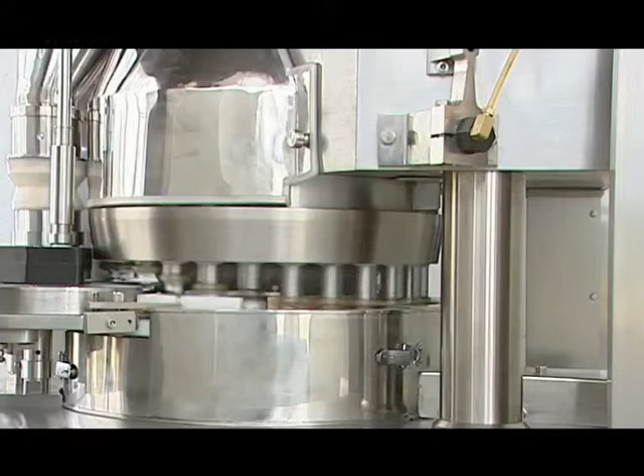GZPT series of high-speed rotary tablet press machine produced by Liaoning Tianyi Machinery Company Limited, applied in pharmaceutical, chemical, food, electronic, etc. industry. This machine can press granular material into tablet and applied for the production of round and abnormal medicine tablet, sugar tablet, calcium tablet, etc. in great quantity.

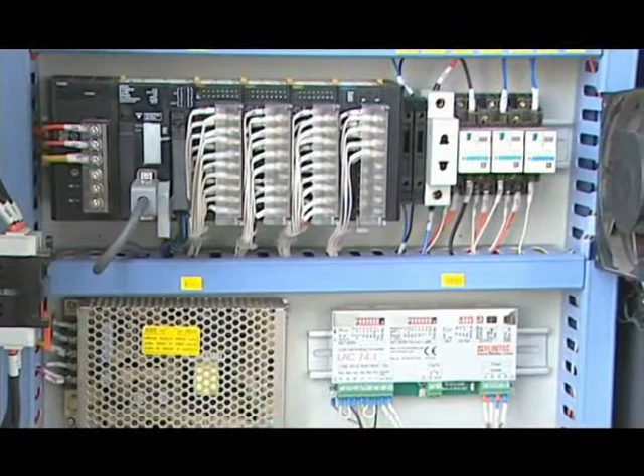Installment and connection. The tablet press machine must be installed on four shock absorption bases, cannot be fixed on ground after installing and locating the machine. Use level indicator to calibrate and level the machine. The electric power must be connected to pad board L1, L2, L3, and PE. In distribution box, ground wire needs to be connected to ground PE according to the rule of this machine.

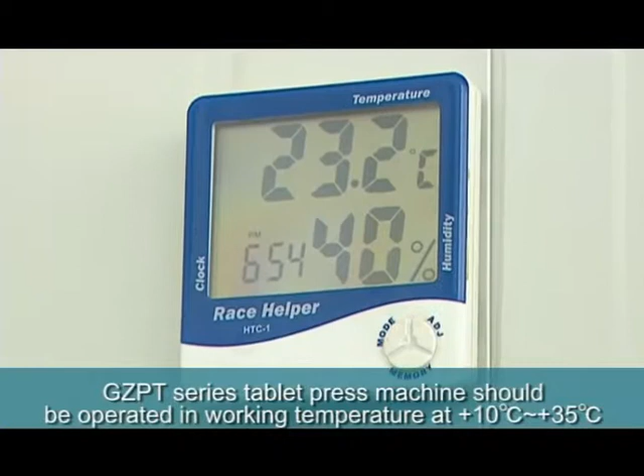Before starting the machine, check working voltage of electric power to see if the voltage is in accordance with the given number. The right rotating orientation of the module plate is from left to right, anti-clockwise. GZPT series tablet press machine should be operated in working temperature at 10 to 35 degrees centigrade. Relative humidity less than 85%.

Structure and working principle of tablet press machine. The tablet press machine can be divided into two parts, upper part and the lower part of a terrace. The upside of tablet press machine is the totally sealed tableting room. This is the part to complete the whole working procedure. Include the force feeding system, punch press system, tablet output equipment, dust collector system.

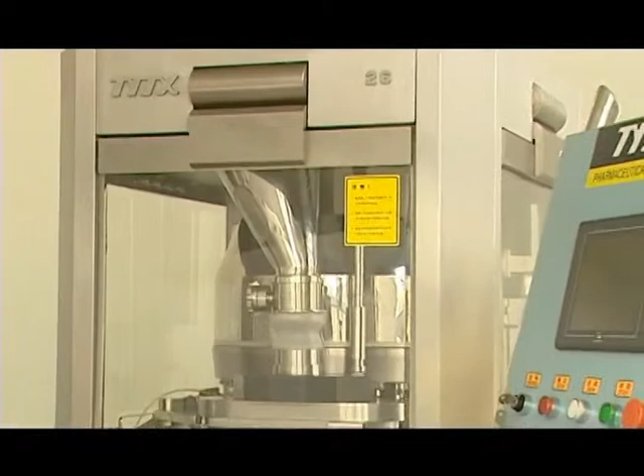The components of tablet press room include top plate, cover board, and a glass door. Through gland strip, the glass door can seal the tablet press room totally to prevent the pollution from outside. The units of the lower part of tablet press machine include the main drive system, lubrication system, etc. Through gland strip, the front and the back door, left and right door can seal the lower part totally to prevent the pollution from powder.

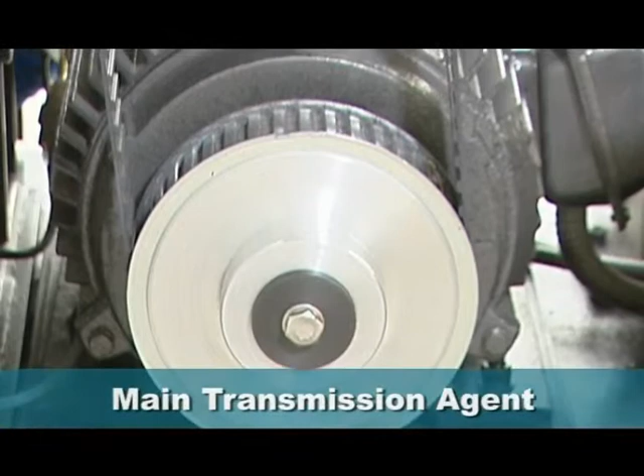Working process of tablet press machine. Filling, pre-pressure, main pressure molding, tablet output. Main transmission agent. Main transmission agent includes AC motor, big belt pulley, synchronous cog belt, little belt pulley, hand wheel, worm wheel reduction gearbox, main axis, transducer, etc.

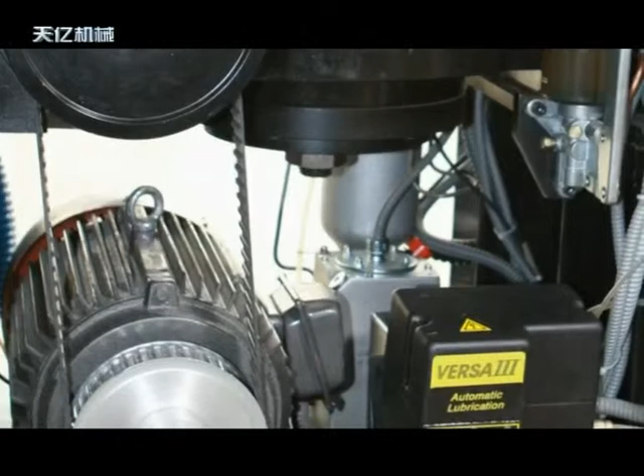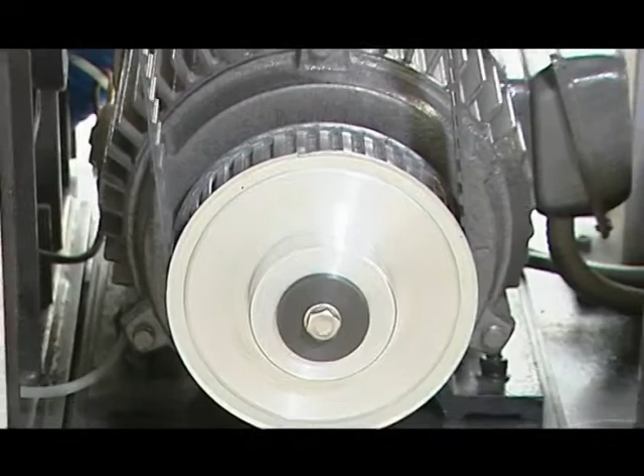Outputting axis from main motor connected with the little belt pulley through straight key. Little belt pulley transmits the power to big belt pulley through a cog belt. Big belt pulley connected with a worm rod of the speed gearbox. Worm wheel installed on the main axis directly. Main axis connected with the module plate through caulking rim to drive the module plate.

The machine allocates a set of independent hydraulic system, a set of electric thin oil, and a manual grease lubrication system to provide lubrication for every part of the machine.

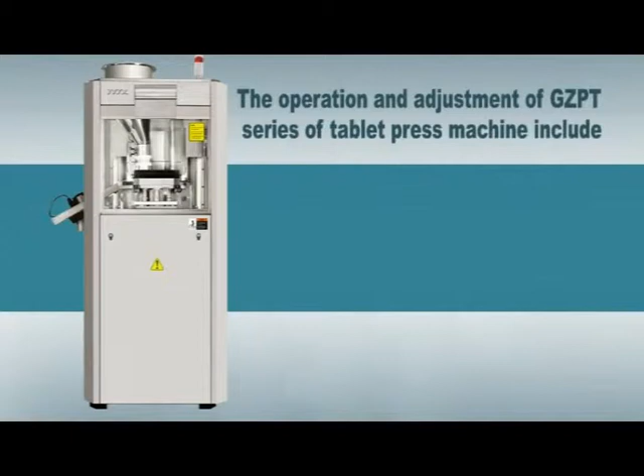Machine operation and changement of a module. Now we take GZPT-26 as example to introduce the machine. The operation and adjustment of a GZPT series of high-speed tablet press machine include installment, checking, running, and main parts demarcating.

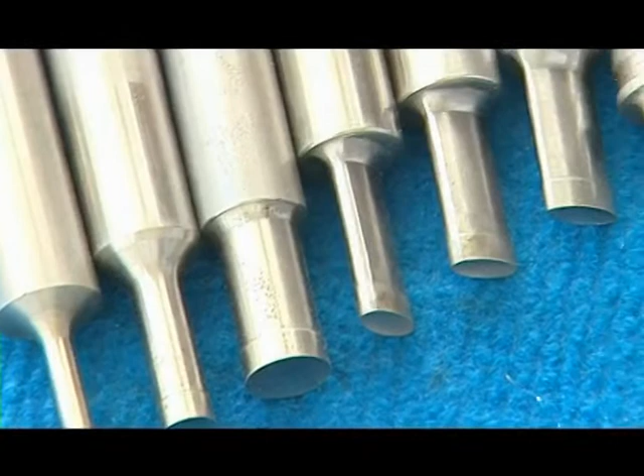Installment of the machine includes installment of a module, changement of the cam of a lower guide rail, installment of a powder scraping plate, installment of the parts of a powder blocking rod, installment of a feeder. According to the different module installed, the tablet press machine can press the tablet in different shape, such as round, abnormal, or cartoon tablets. Here, we merely introduce the installment of round and abnormal module.

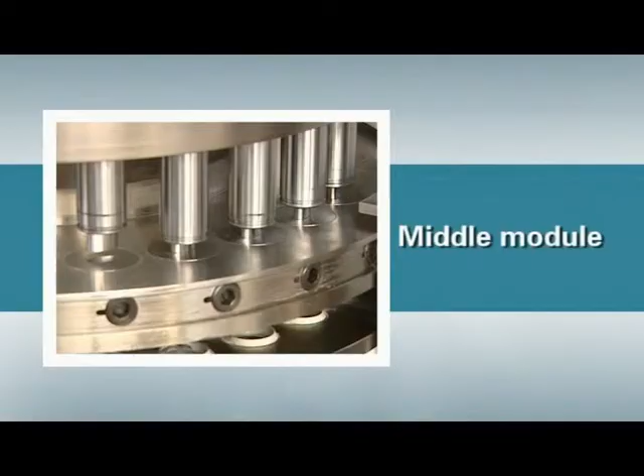Installment of round module. Installment of round module includes the installment of a middle, upper and lower module. 1. The installment of a middle module. Open the front glass door. Take away the force feeder and the little guide rail in front of the upper guide rail. Unscrew the module fasten structure. Note, the head of a middle module fasten structure cannot come out to the outer margin surface of the middle module plate. Clean up the middle module hole with module base cleaner.

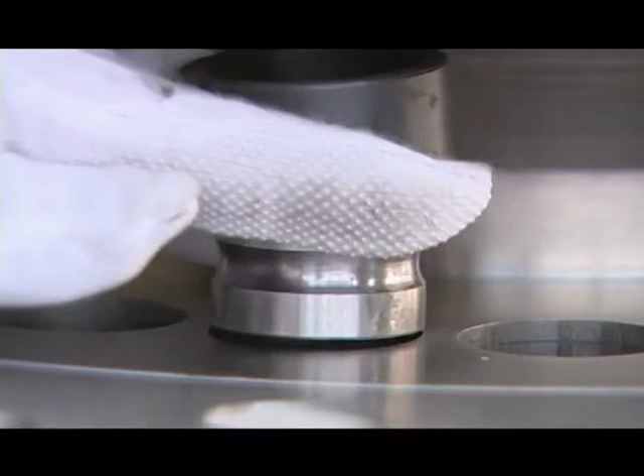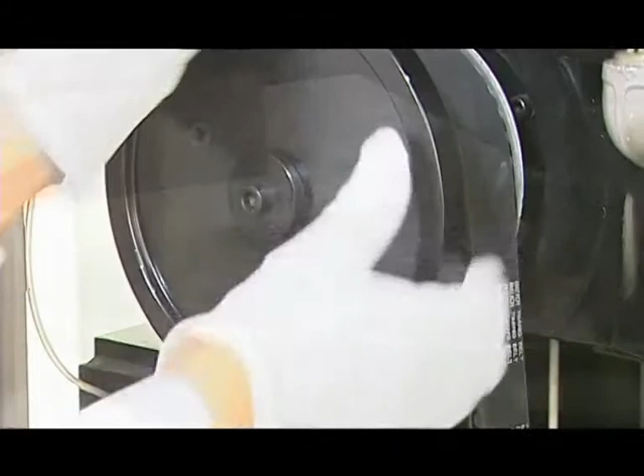Match the middle module in front of the middle module hole and place the middle module at the trough of the guide rail disc. In a middle module mounting pad, flip middle module with a handle spindle. When the middle module enters into the hole by 2/3, thumb it into the right place, then fasten the module fastening combination. Run the machine by hand. Install all the middle modules according to the above direction. Use the knife straight edge to make the gap between head face of a middle module and working table of a middle module plate at 0 to 0.03 millimeters.

The installment of upper module. Clean the upper module at the trough in front of the upper guide rail. Put the upper module into the hole. After all the upper modules are installed, install the upper module protecting plate. Note: be sure that the protecting button is pressed. Install the oil receiving ring.

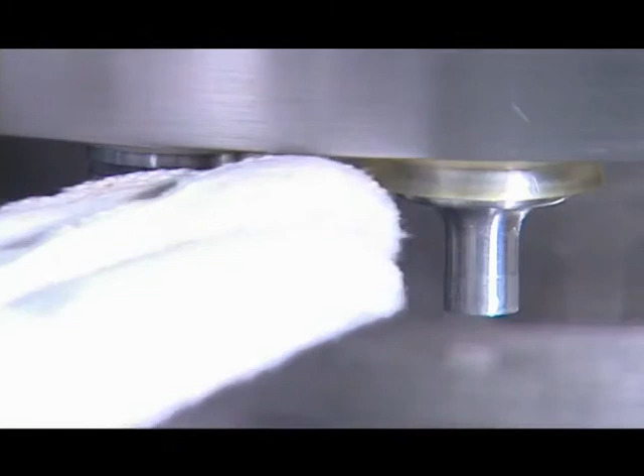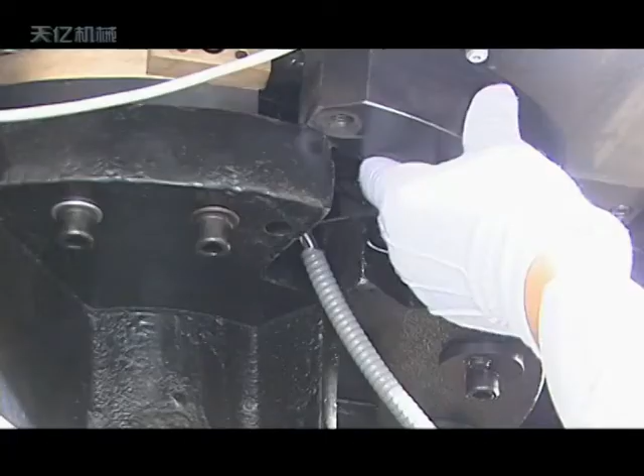The installment of the lower module. Take away the transmission block and clean up the lower module. Press on the pressing board. Install the lower module into the hole and push it upwards. After all the modules are installed, install the transmission block and fasten screws. Note: protecting button must be pressed by transmission block. 2. Installment of abnormal module.

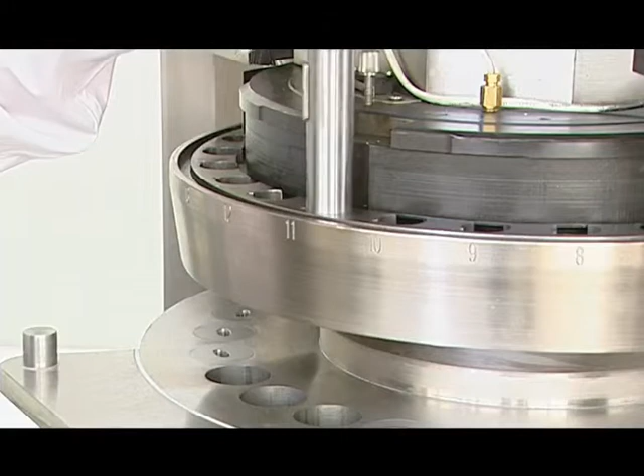The installment of the lower module of abnormal module is the same as the installment of round module, but a little different between the installment of a module and the upper module. Take away the little guide rail on the upper guide rail plate. Make the key of the upper module match the key slot of the upper module plate. Then insert the upper module and get the upper punch into the middle module.

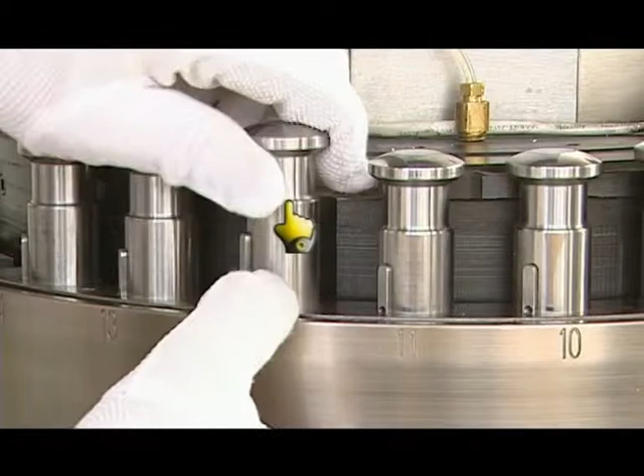Install the next group of upper and middle modules after that, dovetailing into each. After correctly installing the last middle module, put out the upper module, fix the little guide rail, fasten screws, then install the upper module.

3. Change of upper guide rail cam. The filling depth of the powder could be adjusted through the change of the upper guide rail cam. First, take away 7 to 9 pieces of upper punch and unscrew the screw under the upper guide rail cam. Take away the location pin component beside the screw.

Then move the outside base plate of the upper guide rail cam forward. Put out the upper guide rail cam clockwise. Move aside the base plate and take the upper guide rail cam off. The installing process is contrary to the dismantling process.

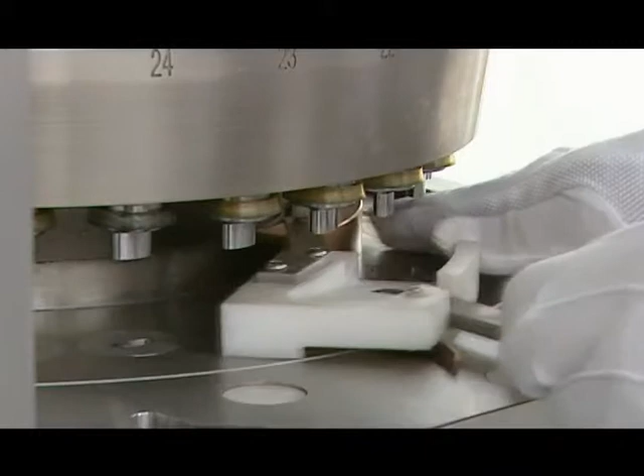4. Installment of the powder scraper. Connect the copper collar and the powder scraper with a pin and install them at the right of the module disc. Adjust the support plate to make the pressure board press on the module disc smoothly. Check the connecting status of the powder scraper on the middle module disc. No gap but have elasticity.

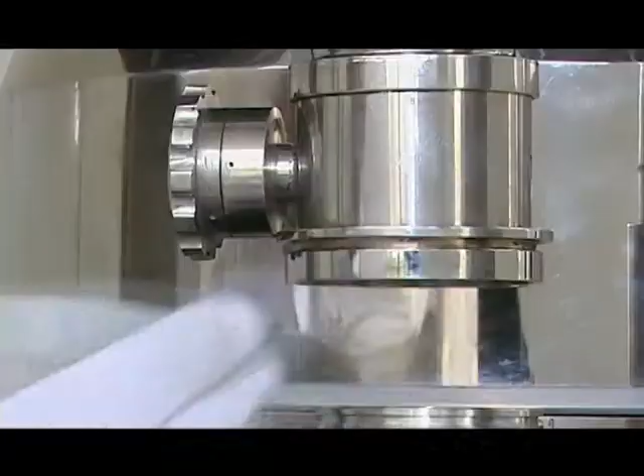5. Installment of feeder. Pull the cleaned feeder in along the upper surface of the plane stage. Lock the feeder with the pressing handle. Connect the chute outlet of the feeder outlet with the extension tube. Rotate the hollow shafting to connect the prolate axis and axis guide. Close the control valve. Now, the GZPT series high-speed rotary tablet press machine is almost installed.

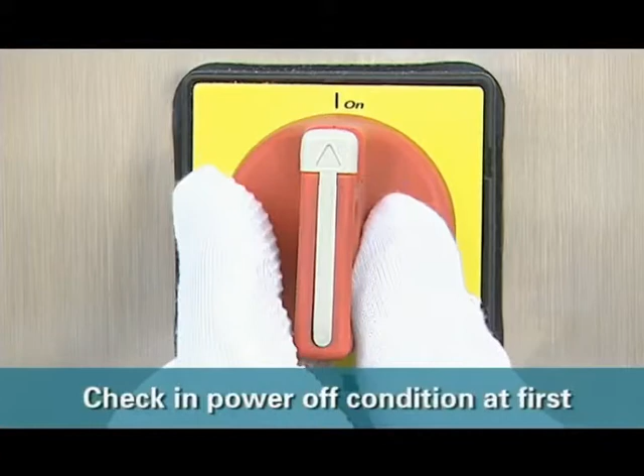Next, we will check the machine. Checking the machine is generally in two stations: loading check and unloading check. 1. Unloading check is the checking of the machine in the state of power off and power on after all the parts are installed. Check in power off condition at first.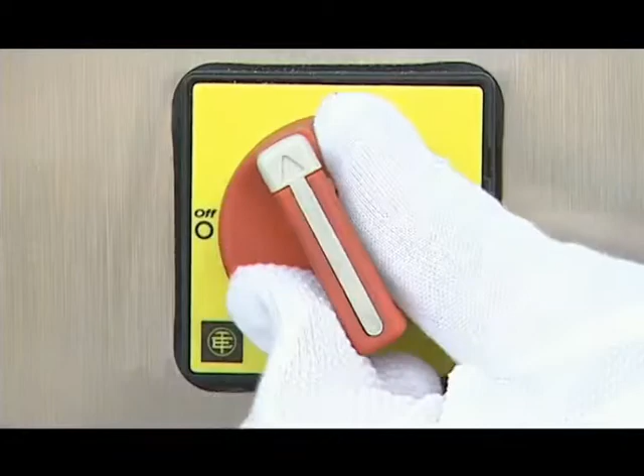After making sure that the machine is normal in the state of power off, checking in the state of power on can be carried out. Starting. Start the machine and enter into the starting interface. Check door and window protection. Enter into the device state interface. Enter into the door and window protecting interface. One can set the state at working or overhauling. When the machine is in the state of overhauling, the open door and window can be ignored.

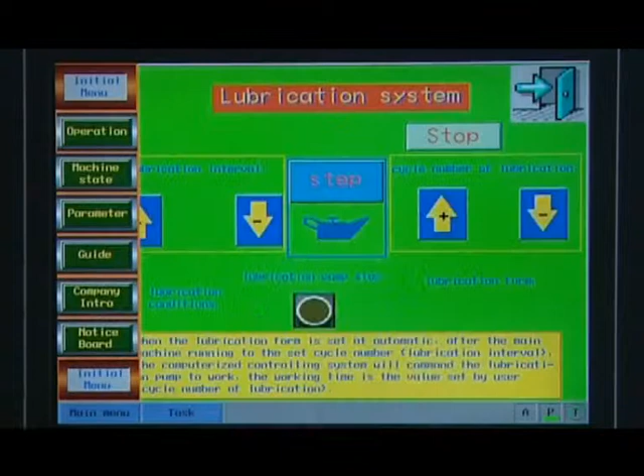Check the lubrication system. Enter into the lubrication system interface. Set the lubrication mode as manual. Press the manual lubrication button. Oil pump running and indicator light twinkling. Lubrication interval and the lubrication cycle can be set according to the practical situation. Back to device state interface.

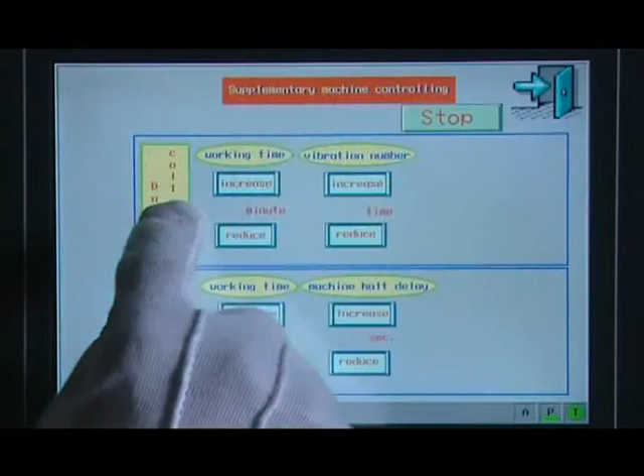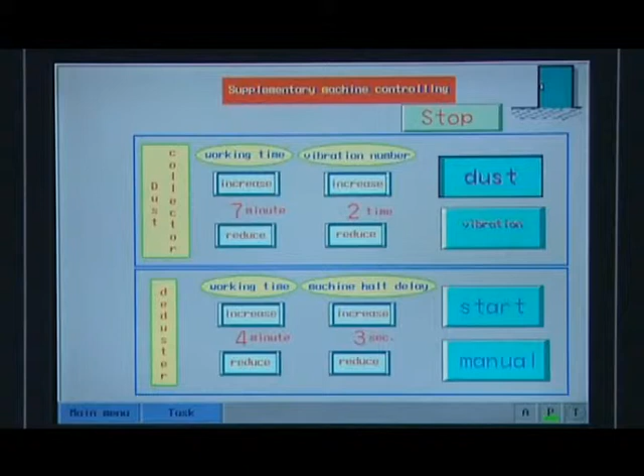Check if the dust collector is normal. Enter into the donkey engine controlling interface. Touch the dust collector key. The dust collector is running. Touch the shaking key. The shaking unit of the dust collector works. User can set the automatic working time and the number of times of dust collector shaking.

Check the deduster. Touch the starting key of the deduster, and the machine will start working. Touch this key again, and the machine will stop working. The automatic working time and the machine halt delay could be set according to different requirements. Back to device state interface.

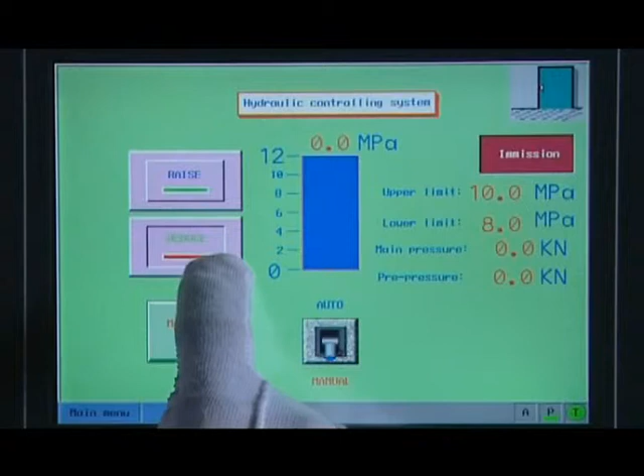Check the hydraulic system. Enter into the hydraulic controlling system interface. Pressing the lifting pressure and the releasing pressure keys separately can carry out the operation of hydraulic lifting and releasing pressure. Choose the input limits key for input permitting state to change the set values of hydraulic upper limit and lower limit. Cut manual state over to automatic state. The hydraulic value of the hydraulic pump can be controlled by computer. Back to device state interface.

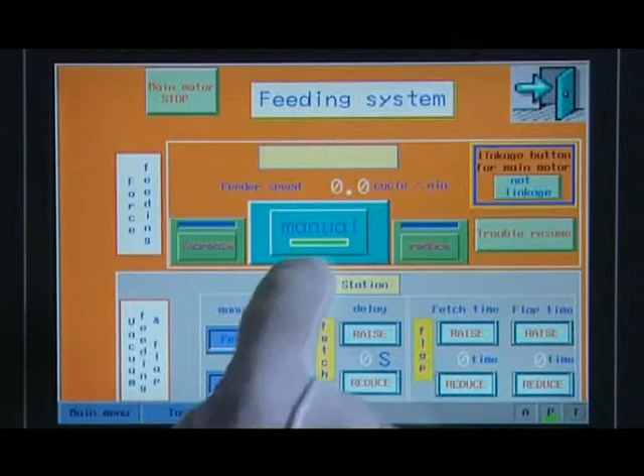Check the feeding system. Enter into the feeding system interface. Press the manual feeding button. The feeder is running. Touch the speed up key. The feeder speeds up. Touch the speed down key. The feeder speeds down. Press the feeding button again. Feeder stops running.

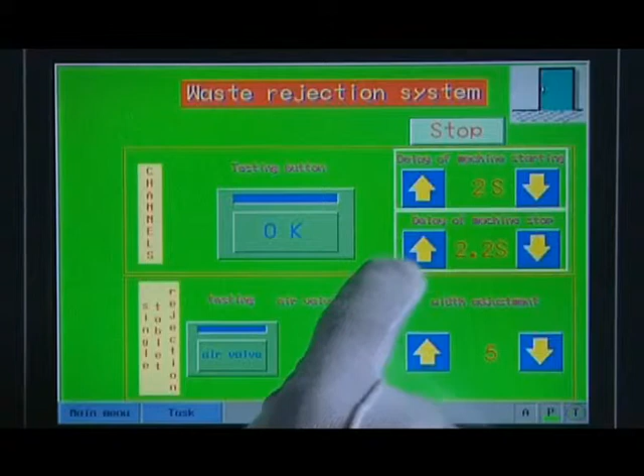Back to device state interface. Enter into rejecting system. Check the tablet output blocking board. Touch testing key. Tablet output blocking board. Open qualified tablet channel at right. Close unqualified tablet channel at left.

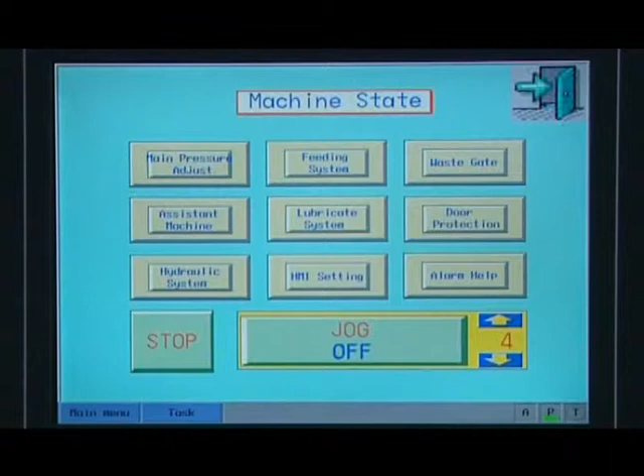The automatic delay time of the tablet output blocking board can be set when the main motor is running and stopping. Touch back key. Back to device state interface. Back to device state interface.

Enter into main pressure and fitting adjustment interface. Adjust the main pressure lifting and the main pressure reducing button. Observe the running parts of the main pinch roller. Make sure that the rotating action and orientation is right.

Adjust the tablet weight increasing and the tablet weight decreasing button. Observe the working part of the fitting adjustment and make sure that the rotating action and the orientation is right. Other checking: checking of a pressure value and a pressure amplifier.

Adjust pre-pressure. Through adjusting the pre-pressure hand wheel, run it manually, check. If the running is normal, press the running button to start the machine after everything is normal. Enter into single value monitoring page. The single value should be in 0.1 to 0.4 kN. It should be set to 0 if the number is not right.

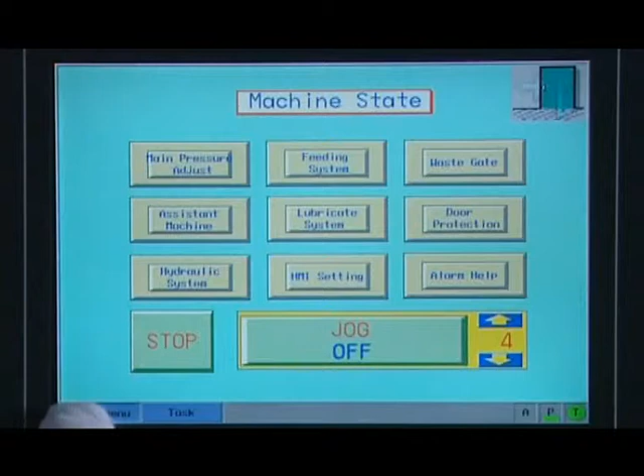After unloading, check in the state of loading. Spring check. Turn on the powder hopper switch. Enter into feeding system interface from the device state interface. Press menu fitting key. Make the feeder impeller rotate. Press speed up and speed down key to set the rotating speed after powder is filled up.

Touch manual fitting key. Set the fitting and go back to production running interface. Set the converting state of the rejecting channel as reject state, namely voice rejecting. Run the machine manually. Check if the machine runs and sounds normally. Production running will be carried out after everything is normal.

First, we need to set parameters for test running. Every parameter needs to be set for first production. Run it by hand and lift the pressure a little to shape the tablet. Note, the pressure should not be too heavy at this moment, just need to shape the tablet.

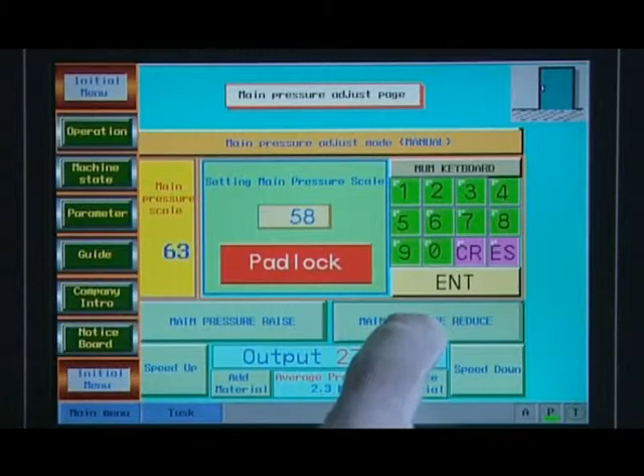Press running button, the machine runs. Through pressing powder increasing and powder decreasing button, adjust the weight of a tablet. Collect and weigh the tablets pressed at a stable average pressure value. After the weight of a tablet is qualified, press running, adjust the press lifting or press reducing button. Make the thickness and weight of the tablet reach the qualification.

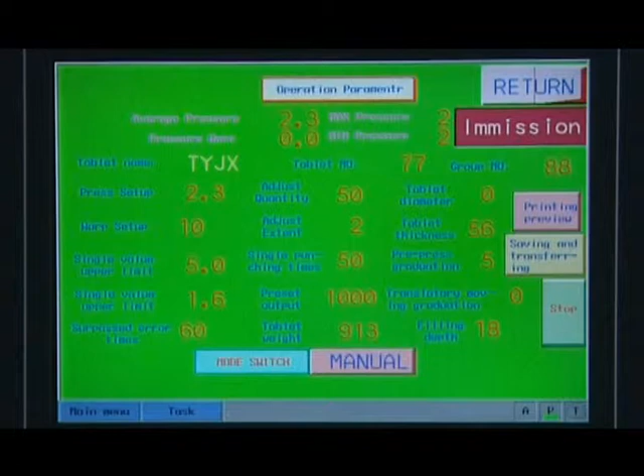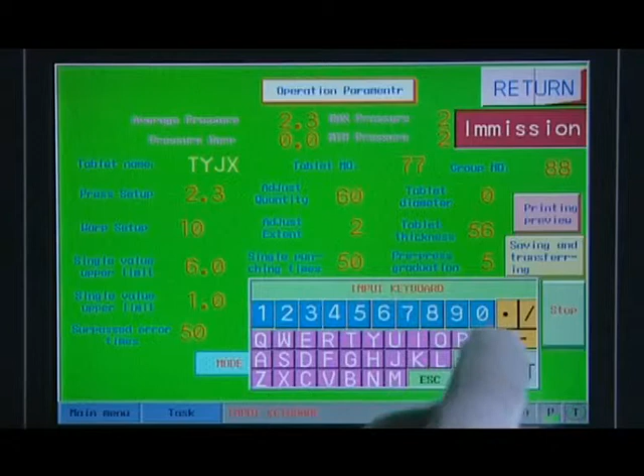Enter into parameter setting page, refer to the average press value, etc. Put the actual parameter value on the front of the page into the setting press parameter. Single value upper limit and single value lower limit are also set according to the actual value of max pressure and min pressure. But in principle, the value width is wider than the actual value of max and min pressure. Set standard deviation, running out times, adjusting width, single shot times, etc.

After setting parameters, cut over to automatic state. The machine will compare the set parameter to the actual average press value detected to adjust the tablet weight automatically.

How to invoke the saved parameter. After setting the parameter, touch the parameter saving invocation key. Enter into parameter saving invocation interface. At this moment, one needs to save the setting parameter. Touch the parameter number of the saving position. Press the saving key, and then the setting parameter is saved in the relative position.

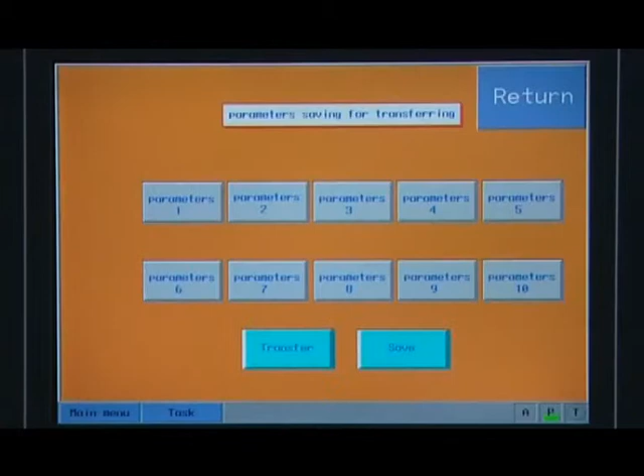When the saved parameter needs to be invoked, on the parameter saving invocation page, choose and press the number of the saved parameter. Press invocation button. The picture will invoke the parameter automatically. The code for the manufacturing parameter page and the related amendment could be carried out at this time.

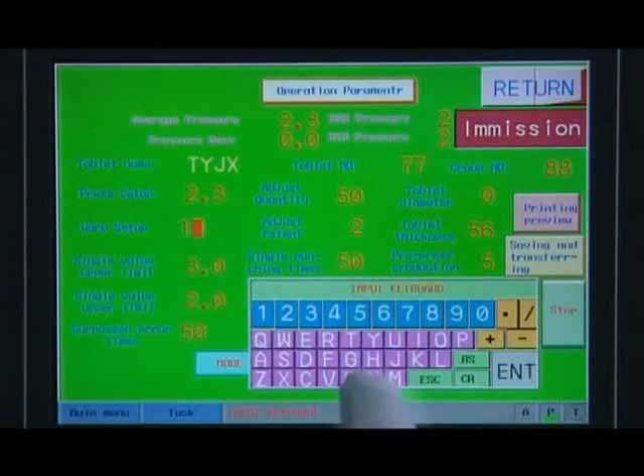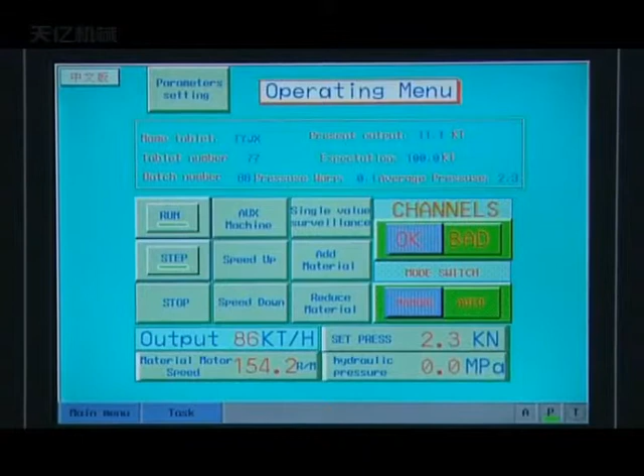Machine running. Press the main motor speed up button. Speed up the feeder rotating speed. Press feeding increase or feeding decrease. After detecting the tablet weight is qualified, make the average press value on production running page similar to the set press value. After the tablet weight is qualified, you can cut the mode over to automatic state. The parameter could be preserved after setting.

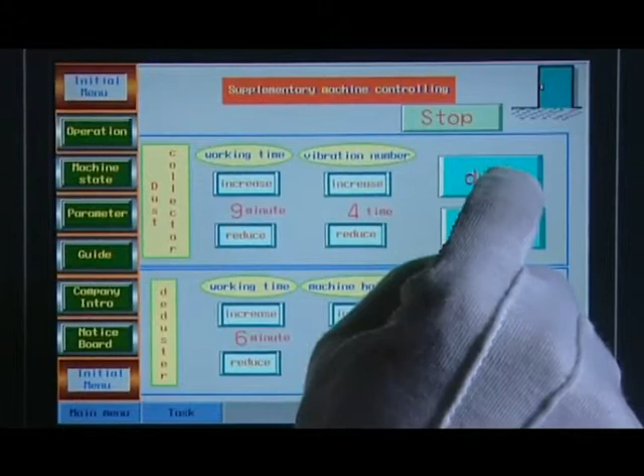Back to production running page and touch rejecting channel transfer key. Relieve force rejecting. Enter into donkey engine controlling page. In device state, start deduster, dust collector. The production will not need to be changed after settlement.

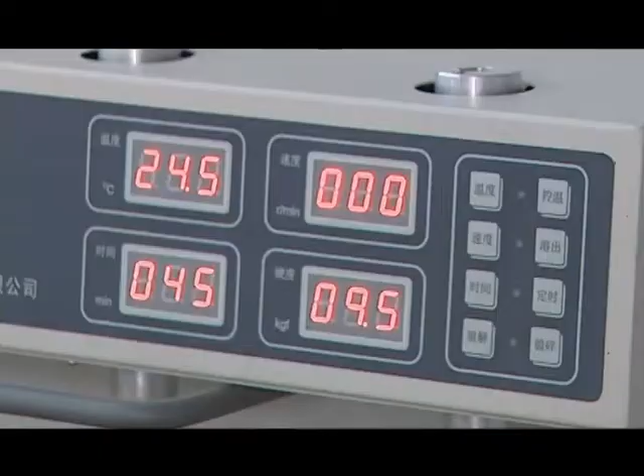If you want to change the speed, touch and click the speed up or speed down key time by time. Make the speed change slowly. The effect of automatic tablet weight adjustment will be better. When the required speed is reached, test the weight and the hardness of the tablet. Enter into single value overseeing interface. Observe the single module pressure value and average pressure curve.

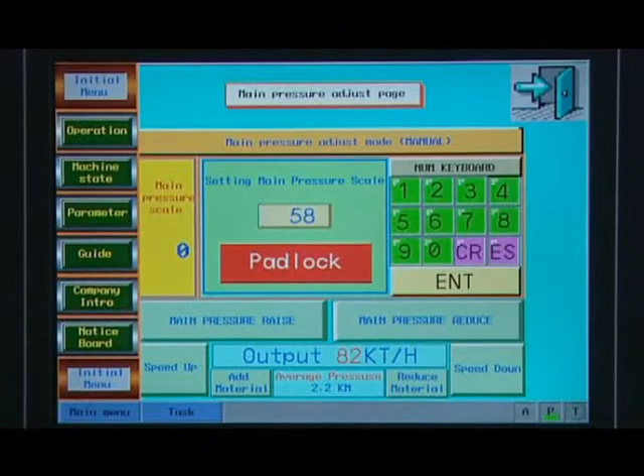Two kinds of machine halt: high-speed machine halt and lower-speed machine halt. High-speed machine halt: press the halt button in a state of emergency and press the pressure reduction button immediately. Reduce the pressure of the main press wheel to a certain position. This halt mode can only be used in a state of emergency.

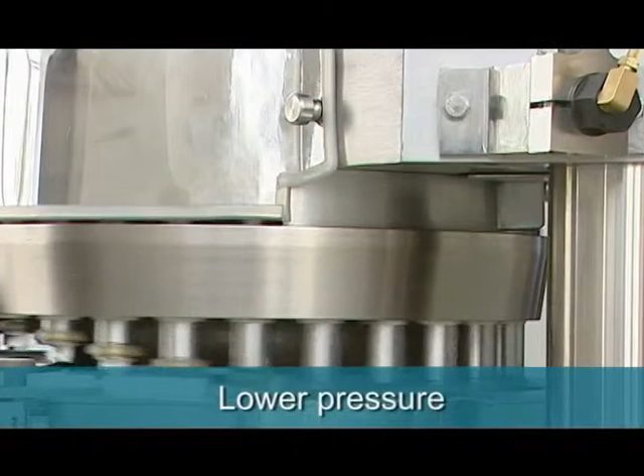At automatic mode, press the speed down button. Reduce the speed slowly. When the speed is reduced to a lower speed, unloading could be carried out at automatic halt, and it is fit for the situation of lower power location and lower pressure. Pressure reduction machine halt mode is fit for high power location and high pressure. Lower speed machine halt: under high pressure, stopping and unloading. Under lower pressure, stopping but no need to unload.

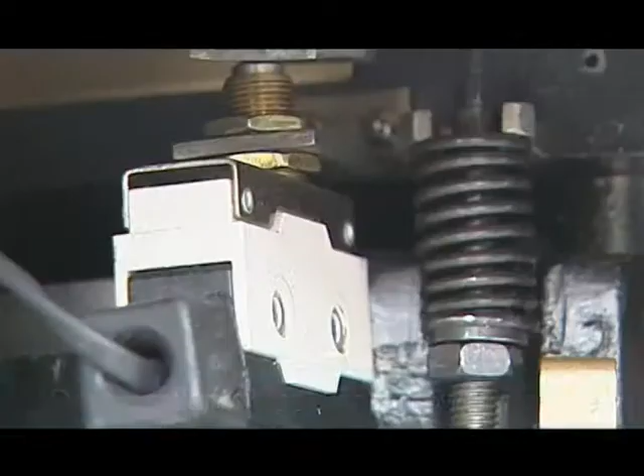Demarcation. 1. Demarcation of two closing upper module. Adjust the running button. Make the machine alarm when lower pressing cam was lifted by upper module for 2 mm. 2. Demarcation for two closing lower module. Adjust the running button. Make the machine alarm when fitting protecting cam was lifted by lower module for 2 mm.

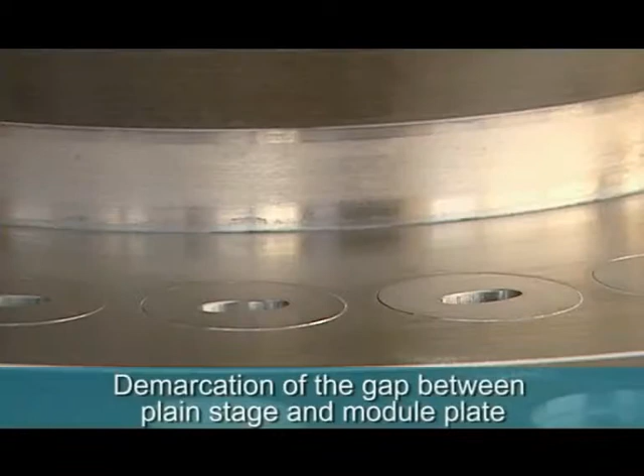3. Demarcation of the location of upper pre-press wheel. Adjust the upper eccentric shaft so that when the upper module is right under the upper pre-press wheel, it enters into module 2 mm. 4. Demarcation of the gap between plain stage and module plate. The gap between the adjacent profile of a plain stage and module plate is 0.3 to 0.5 mm.

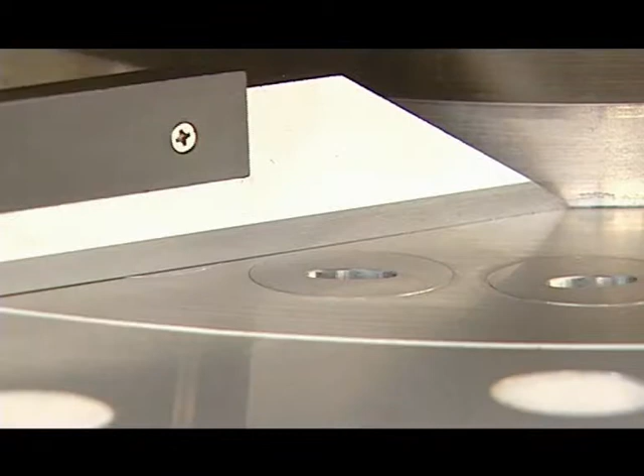5. Adjustment of the gap between feeder and middle module plate. The gap between feeder, substrate, and the module plate is 0.03 to 0.05 mm. Take away the feeder and unscrew guard ring of a leveling leg. Unscrew the plane stage fastening screw under the wide dust cap. Rotate crossbars. Adjust the height of a plane stage.

Fasten the plane stage fastening screw. Use probe stick to measure the gap between feeder, substrate, and the module plate. Install the feeder if it is qualified. Fasten the guard ring of leveling leg. Machine maintenance.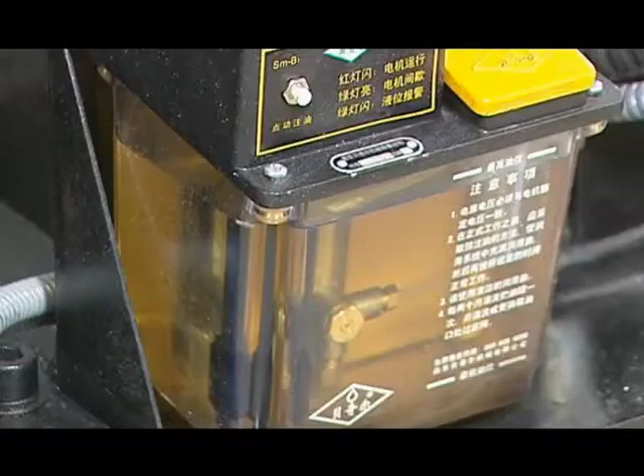Maintenance of a thin oil lubrication system. Check the oil level position of thin oil station frequently. Make a supplement in time when the oil is insufficient. Maintenance of a manual grease lubrication system. Check the oil level position of grease oil station frequently. Make a supplement in time when the oil is insufficient.

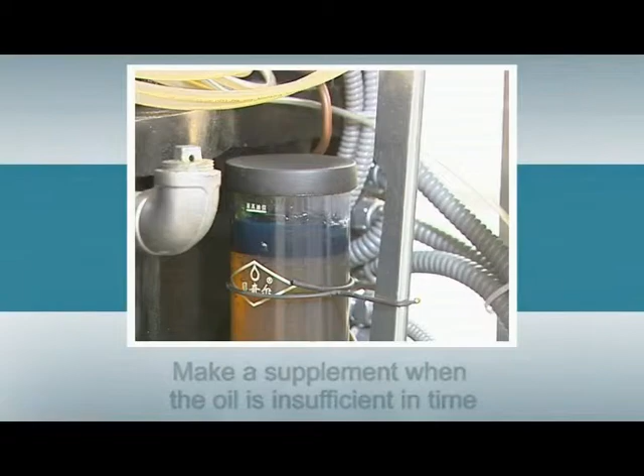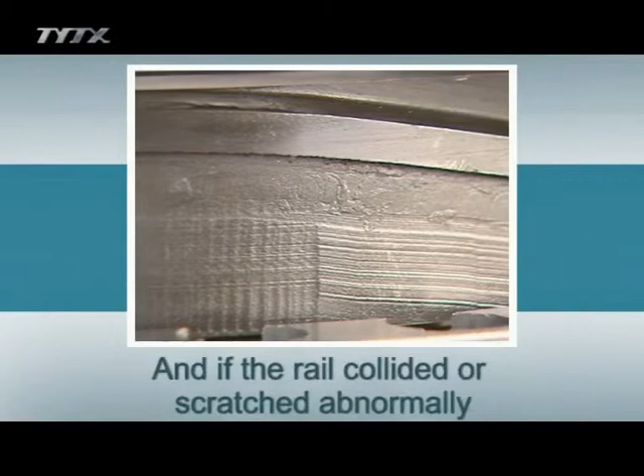Maintenance of a module. Smear lubricating oil on the module every time when disposing it, and the module should be disposed in good order, not put mixed. Maintenance of upper and lower guide rail. Check the abrasion situation of upper and lower guide rail. If the rail collided or scratched abnormally, check if the fastening screws on module are loose.

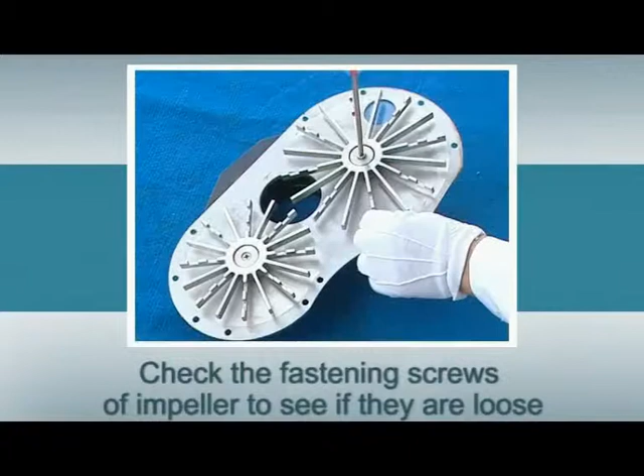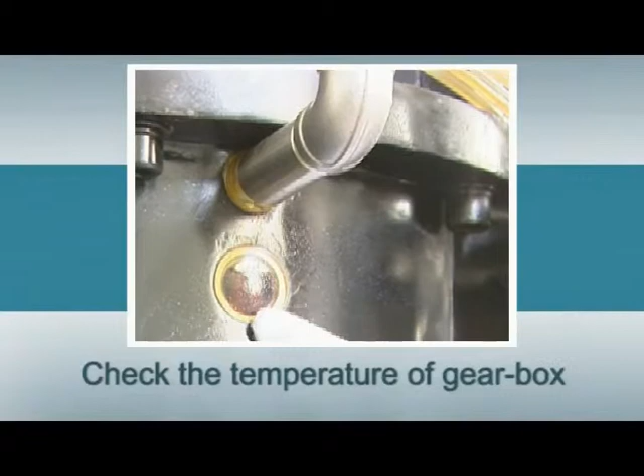Maintenance of a force feeding system. Wipe it frequently. Check and listen if there is abnormal sound in transmitting box. Check the fastening screws of an impeller to see if they are loose. Maintenance of a main gearbox. Check and listen if the sound of gearbox is normal. Check the temperature of the gearbox and change the lubricating oil regularly.

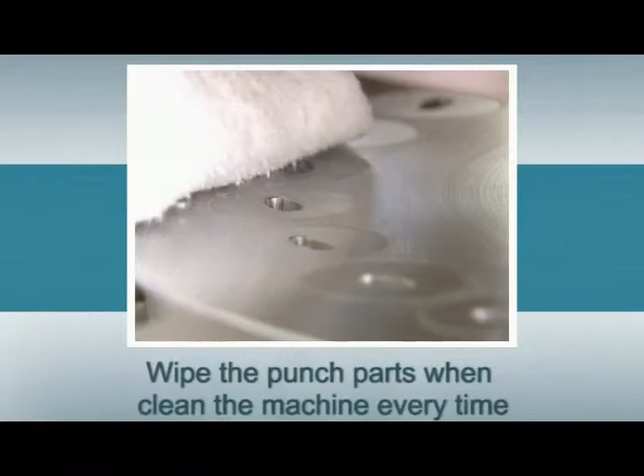Maintenance of upper and lower main pre-press wheel. Check if there is abnormal abrasion on the surface of a press wheel. Check the oil supply situation of the inner bearing of a press wheel frequently. Maintenance of a punch part. Wipe the punch parts when cleaning the machine every time, including the cleaning of the upper and lower punch hole, middle module surface, middle module hole. If the machine is not used for a long time, the punch plate surface should be smeared with lubricating oil.

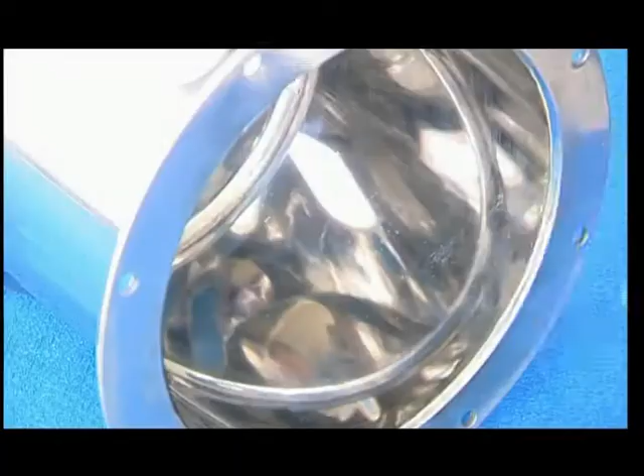Cleaning the hopper. First, unload the hoppers and then clean the cover by the scouring pad. Finally, clean the inside cover and dead angle with the medicine alcohol. They should be covered by the clean plastic for installation.

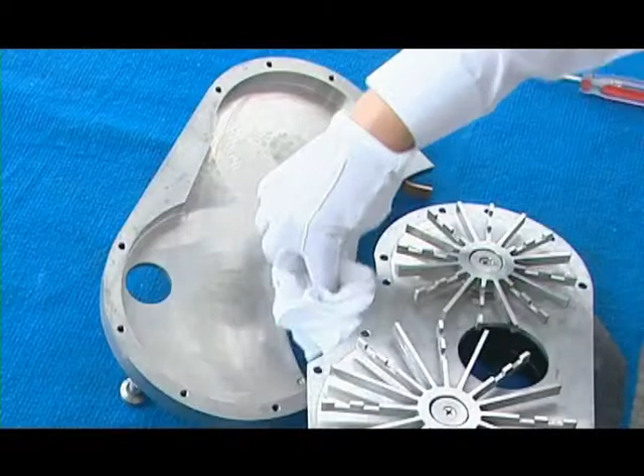Cleaning the feeding box. Loosen two bending irons which are used to fix the feeding box. Unload the feeding box. Unload the pitching screw on the cover of the box. Separate the cover from the body, and then clean lumen of the box body and impeller by scouring pad. The impeller should be unloaded when necessary. Finally, clean lumen and dead angle by medicine alcohol. Clean the impeller and then install in the opposite direction.

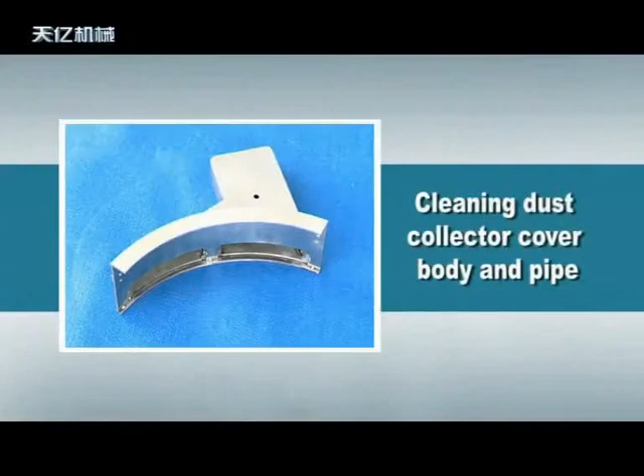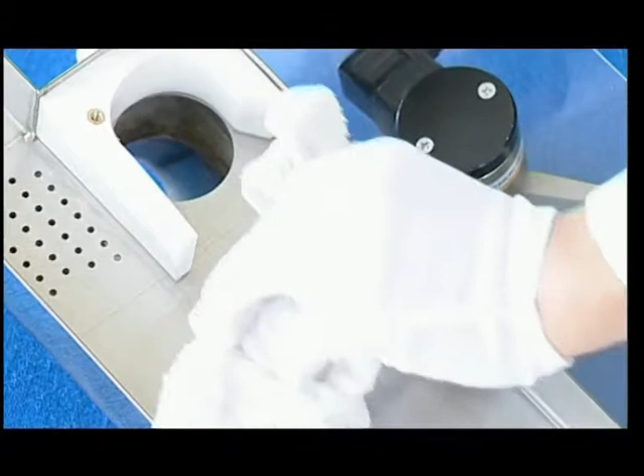Cleaning dust collector cover body and pipe. First, unload the dust collector cover body and pipe. Clean the lumen and cover with a scouring pad. Finally, use the medicine alcohol and then wash the dust collector pipe with water until it is dry. First, unload the two tablet cell bodies from the machine, and then clean the lumen by medicine alcohol separately, and then install it in the reverse order.

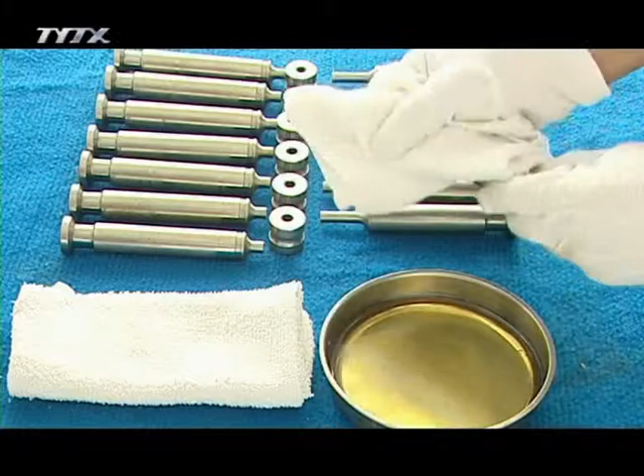Cleaning the punch plate. After unloading the module, clean upper and lower punch plate cover. Upper and lower punch plate module hole should be cleaned by brush. Middle punch plate module hole should be cleaned by scouring pad. Cleaning upper and lower punch and die. Unload the upper and lower punch and die and then clean them. After that, cover them with lubrication oil and put them into the special box. Reinstall the module. Clean the cover of the punch with medicinal alcohol. Install the punch and die into the machine.

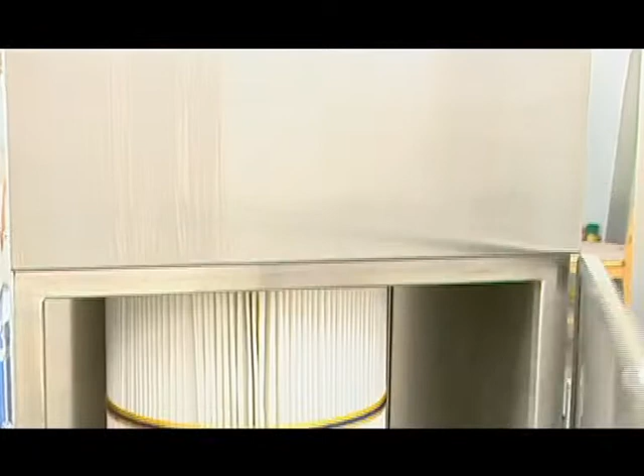Cleaning the deduster. Pull down the outer of the polisher and then clean the net and the lumen surface. Clean the dust collection pipe and install the machine in the reverse direction. Clean the dust collector. Pull down cartridge filter of the dust collector, clean it by the clean water. After cleaning, the dirt of the dust collector should be cleaned by the medicinal alcohol and install it in the opposite direction.

The above summary is the main introduction for this machine. Please read Operation Introduction for specific introduction.